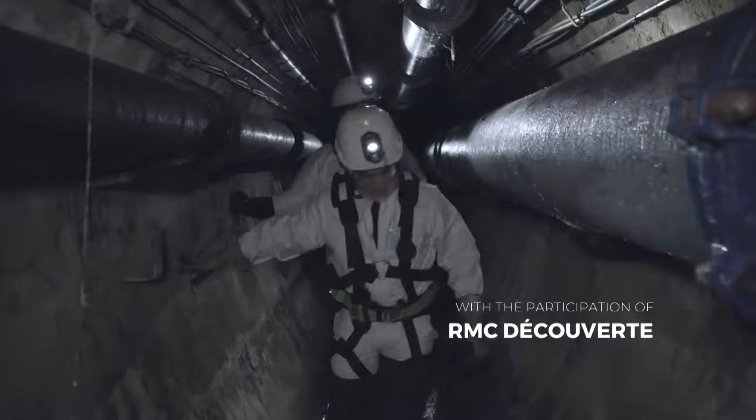Actually, underneath each street in Paris, there's a sewer that's accessible. It feels like entering the bowels of the earth. Like the city above, the pipes below are always on the move.

Every turn of a tap, every flush of a toilet, every minute of every day, Parisians depend on the waste they take away and the fresh water they provide. How does it all work so seamlessly? Now, thanks to unprecedented access and computer-generated imagery, you're about to discover the secrets of the Paris sewers, where close to 6.5 million cubic meters of wastewater travel daily, equal to 70 Olympic-sized pools per hour.

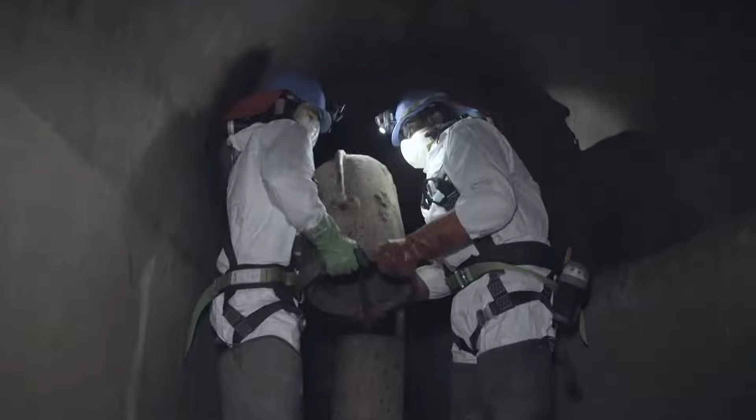This massive infrastructure demands extraordinary equipment, from high-power flushing systems and huge reservoirs to century-old boats designed to clear sand. The sewers are an undeniable part of the technical and urban legacy of Paris. The know-how and these extremely advanced constructions and machines have withstood the test of time.

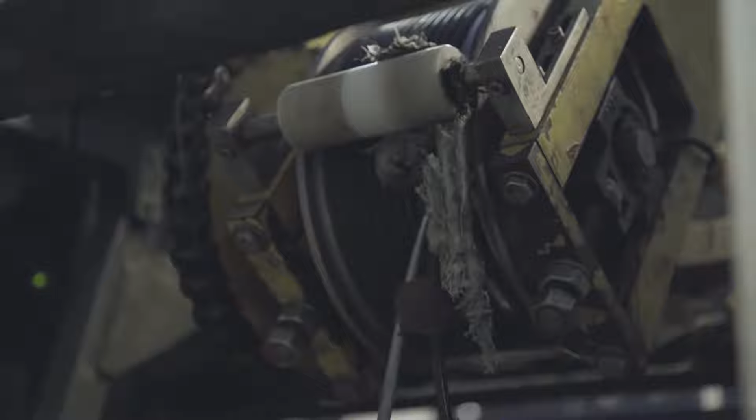Since its creation in the 19th century, the modernistic sewers have transformed to keep pace with the vital city above. Witness the elaborate techniques designed to deal with flooding, heavy rainfall, and provide high-speed decontamination. Nowadays, thanks to accelerated techniques used inside the plant, we're able to treat wastewater in just a few hours.

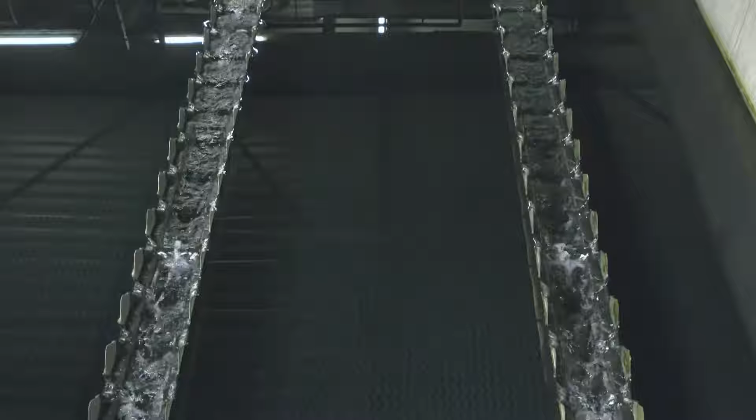From the collection of rainwater and wastewater to the distribution of drinking water, your sewer tour will take you on a fascinating behind-the-scenes adventure in history and technology, deep inside the bowels of Paris, without getting your feet wet.

Every day in Paris, more than 2 million residents flush their toilet, clean their dishes and clothes, and take a shower. All this domestic water ends up in the sewers. This amounts to over 6.5 billion liters of wastewater that must be evacuated each day. Every hour, the equivalent of 70 Olympic-sized pools flows inside this invisible yet gigantic infrastructure.

In fact, the sewers are a network of tunnels mirroring the layout of the streets and boulevards above the ground. In total, 2,600 kilometers of galleries meander underneath the city. If they were put end to end, the sewers would cover the distance between Paris and Moscow.

This extraordinary infrastructure serves several purposes. On top of collecting wastewater, these tunnels gather rainwater and prevent the flooding of Parisian streets when heavy storms occur. This network also plays a crucial role in providing drinking water to local residents. The underground galleries host a 2,000-kilometer network of pipes distributing drinking water to every Paris household. Once used, this water returns in the sewer system located only 3 meters underground.

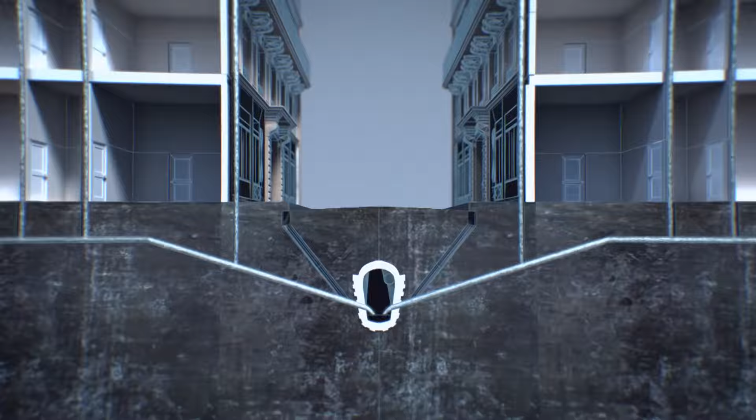Each building has its own evacuation outlet connected to a primary sewer that's about 1.3 meter wide. This first link of the sewer chain then reaches a subcollector. The latter flows in a main collector between 4 to 6 meters in diameter, located under the big Paris boulevards. This system can be compared to what you have in nature, such as a source, a small brook flowing into a river until it reaches the sea.

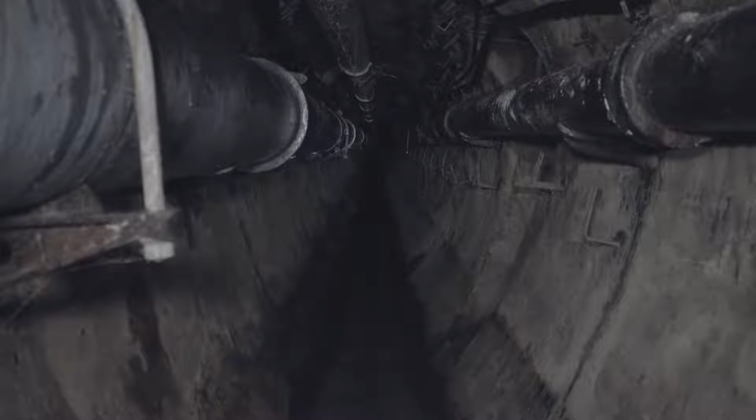It uses the exact same process: the elementary sewer collects wastewater from a single outlet before flowing into a collector and finally reaching the sea, which is represented by the water treatment plant. The mission of the sewer system is to evacuate the wastewater of over 2 million Parisians, 24 hours a day, 7 days a week. In order to maintain this hidden network, city workers go inside the sewers on a daily basis.

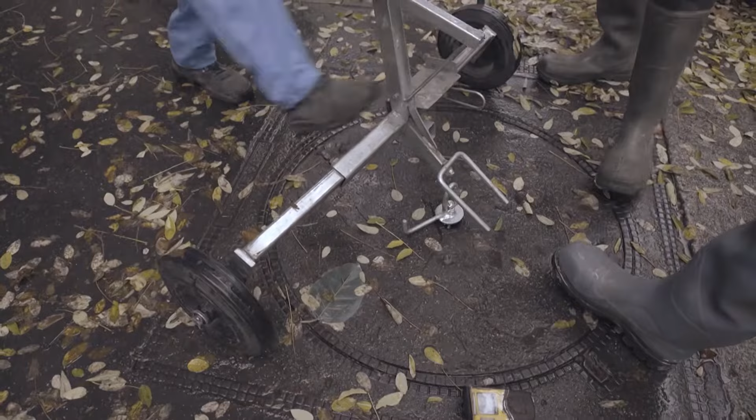Sewer workers access the tunnels through one of the 20,000 manholes scattered across the sidewalks of the capital. Each lid weighs over 80 kilos. Under the pavement, workers find themselves in a confined space ruled by darkness and humidity. This hidden and mysterious part of Paris is completely unknown to most of its residents.

At first glance, the sewer network looks like a maze of alleys and narrow pathways. But in essence, this huge infrastructure is just a mirror of the city streets. Each street, avenue, and boulevard have their counterpart sewer tunnel. This 2,600-kilometer network provides every Paris building with a direct link to this intricate universe.

Right now, we're under Rue d'Alésia. As you can see, sewer workers install signs to serve as bearings. Every building found above ground has its equivalent inside the sewer system. Here, we're under number 61 and 63. These are the two building outlets. Someone probably flushed their toilet or used water from this section of the building, which is now being collected.

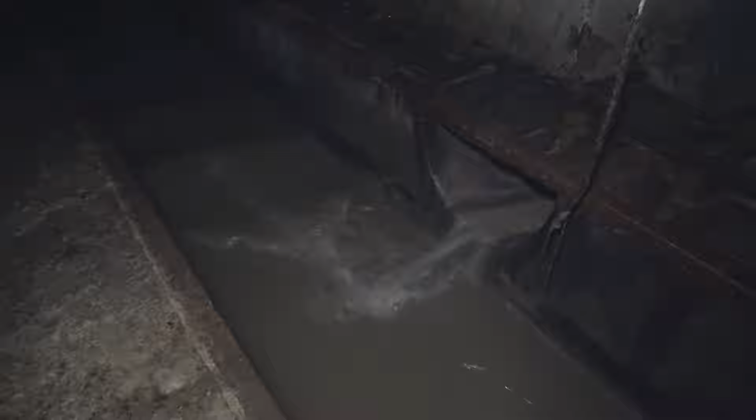Paris has a total of 100,000 such connections, linking every building to the sewer system. Wastewater from each building is gathered in a single evacuation pipe before being discharged into the sewers.

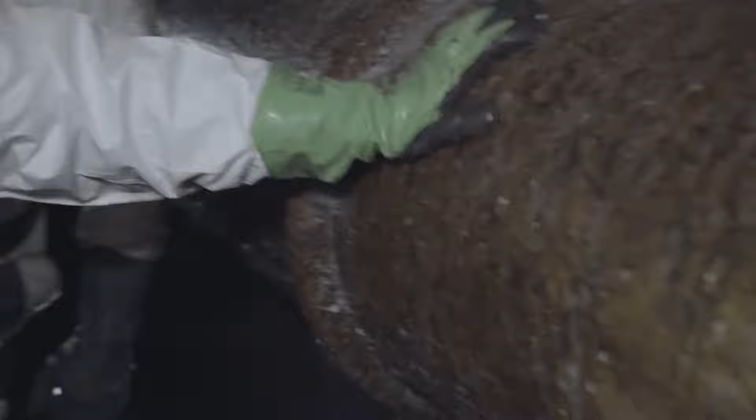In Paris, some 300 sewer workers are responsible for the safe flow of wastewater. Every day, they walk inside the bowels of the capital in order to maintain this gigantic network. These galleries are part of the historical heritage of Paris, designed over 150 years ago.

In the beginning of the 19th century, wastewater drainage was fairly rudimentary. As a result, whenever heavy rains would fall, black water would flood the streets, releasing a foul smell.

Paris was at the mercy of the Seine River. In times of floods, the river would commonly rise through people's cellars and the sewers, which caused the water to pour out onto the streets, carrying garbage, filth, and all the disgusting things traditionally found in urban settings.

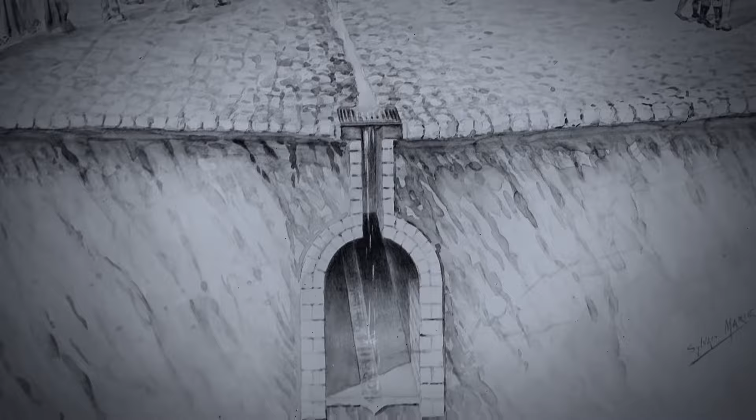In the early 1800s, Paris only had a few dozen kilometers of sewers at its disposal. There were hardly any sewers. Moreover, they were poorly designed and maintained. As a consequence, the city was, according to its residents, unpleasant for both the eyes and the nose.

The poor drainage of wastewater caused several cholera epidemics, killing thousands of Parisians. This dire situation needed to be addressed.

The sewer revolution started with the arrival of Napoleon III and Prefect Haussmann. The city underwent an unprecedented transformation, both on the surface and under it.

Wastewater had to be drained from the streets and the open air. They had to find a way to make it disappear, thus creating a clean city with tree-lined walkways and everything else featured in a typical modern city of that day and age.

For Paris to be worthy of its status as the City of Light, the streets had to be cleansed at all cost. The sewer system was quite important. Not only did the government want their city to be beautiful and bright, but also clean. And a sewer system was a key part of this urban planning that also carried a political aspect.

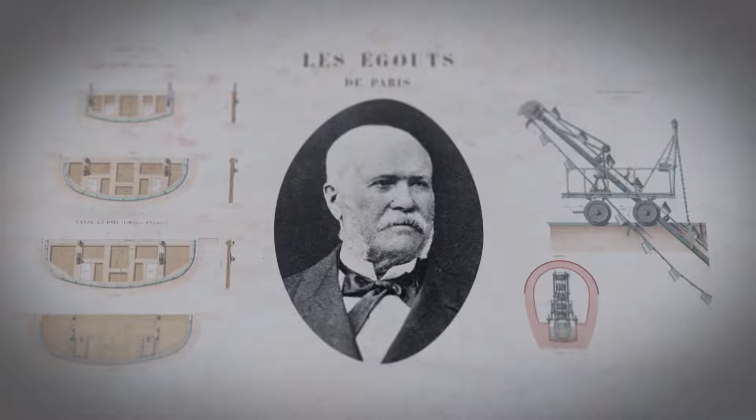To clean Paris, Prefect Haussmann entrusted visionary civil engineer Eugène Belgrand with this ambitious mission. Belgrand's goal was to drain black water through a gigantic underground sewer system.

Belgrand's idea was to develop an underground city planning far more advanced than before. He wanted to dig underground galleries able to collect a large amount of water, and in doing so, to develop a city on 2 levels. The scale of his project was quite utopic.

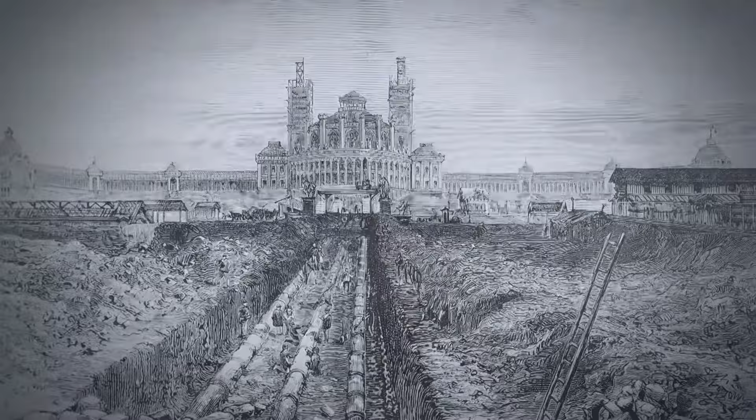To see their mission through, Haussmann and Belgrand undertook colossal work. Every street of Paris was successively ripped open and tunnels were dug. The work stretched over several decades and forever changed the face of the capital.

By designing this huge underground infrastructure, Eugène Belgrand revolutionized the Paris sewers. In order to drain the capital's sewage, he imagined a gigantic network collecting both wastewater from every household as well as rainwater.

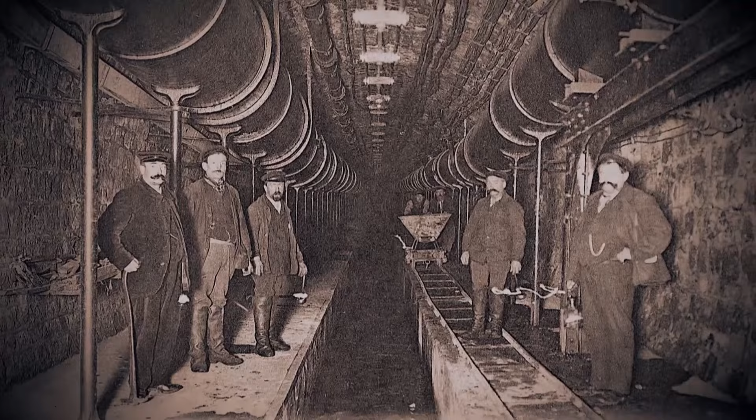Under the action of gravity, these waters would flow towards the northwest of Paris, thanks to the city's natural hills. The system works automatically, relying on the principle of gravity, and without any mechanical action. The use of gravity, therefore, makes pumping unnecessary, which is a very expensive and tricky system to maintain.

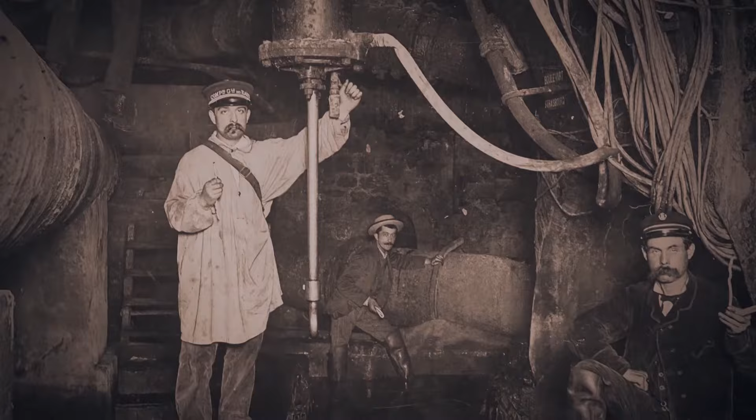Another feature that was unique in the world is that all the galleries were accessible, allowing sewer workers to walk freely along them.

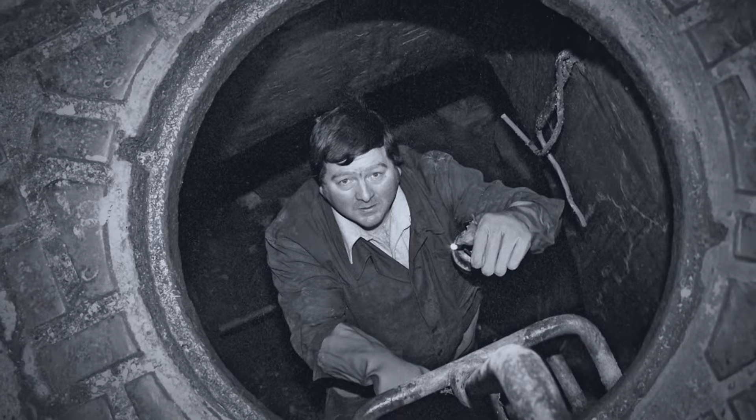Belgrand was a visionary. He established his work's dimensions based on his prediction for Paris's growth and influence on the rest of the world. That's why he designed large, accessible sewers, which facilitated the maintenance work. A blocked pipe requires a lot of disruptive work above the ground, but when the sewers are accessible, we can go inside, take action, and find the source of the problem.

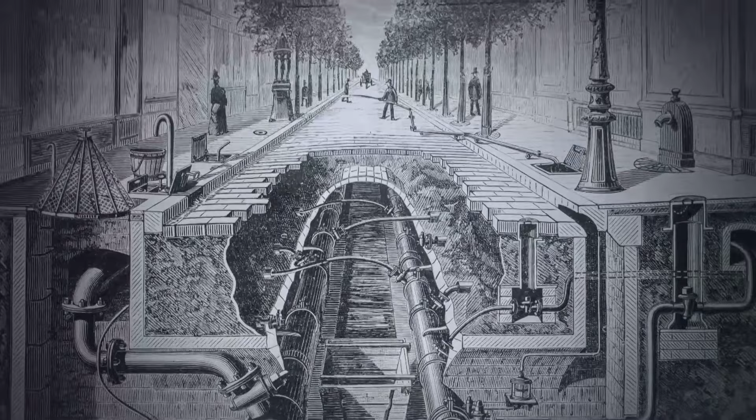In just a few decades, Belgrand and his successors accomplished colossal work. They built hundreds of kilometers of sewers, allowing the discrete drainage of rain and wastewater.

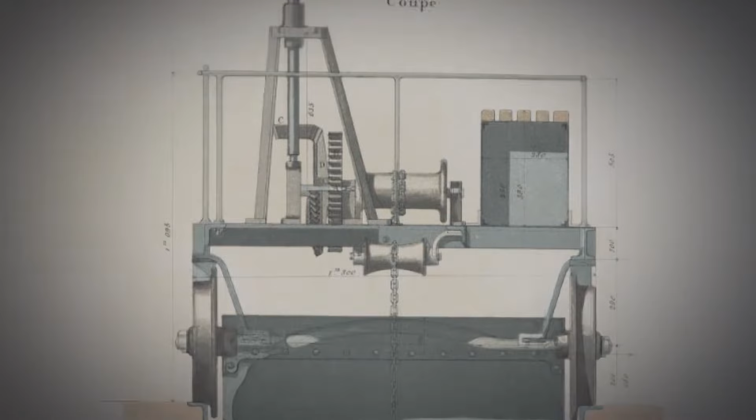But that's not all. In order to maintain and prevent waste matter accumulation inside this gigantic network, Belgrand had an original idea. He imagined a unique, spectacular system: cars and boats designed to travel inside the galleries and scrape the bottom of the sewers.

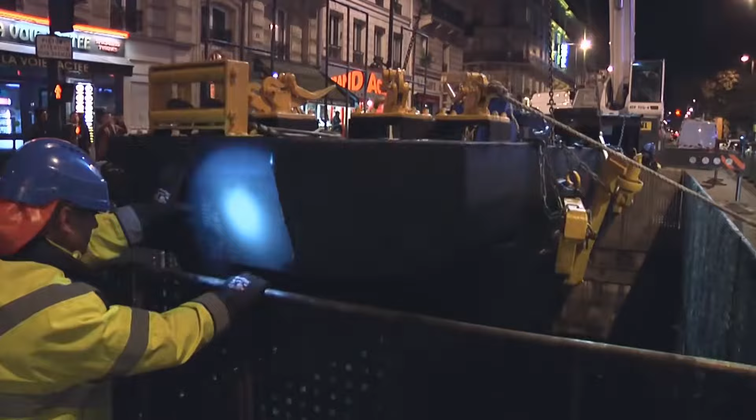To this day, sewer workers use these huge vehicles to go down the city's main collectors. Gate boats weigh almost 5 tons and measure 10 meters in length and 2 meters in width. This delicate operation is usually done at night to avoid disrupting city traffic. It takes 6 hours to lower a beast this size. Once inside the sewers, the scrubbing operation can begin.

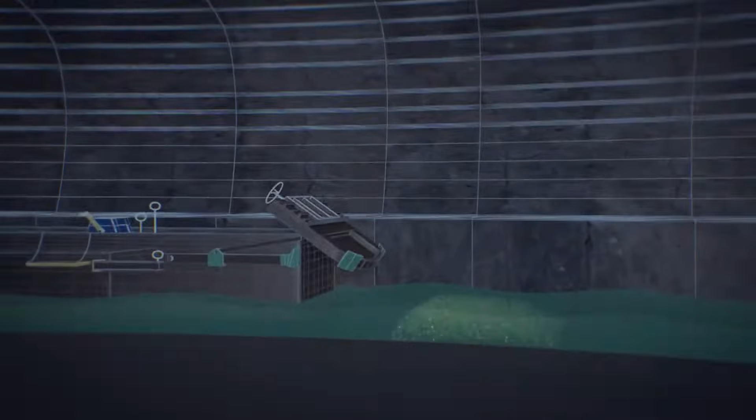When the boat comes to a heap of waste matter, it's blocked. Sewer workers then lower the gate. Moored with chains, the boat is lifted under the effect of rising water coming from the back. When the level of water is sufficient, the gate is swiftly opened. The flowing water removes the deposits and pushes them forward inside the tunnels. This is how the boat makes its way inside the collector, stopping each time a heap appears or when it's blocked by any unusual object.

Inside the collectors, sometimes we find wheelbarrows left behind by construction workers, cinder blocks, car tires, or tree grates like those you find around the trees in Paris. I don't know how they end up in the sewers, but we find them quite often.

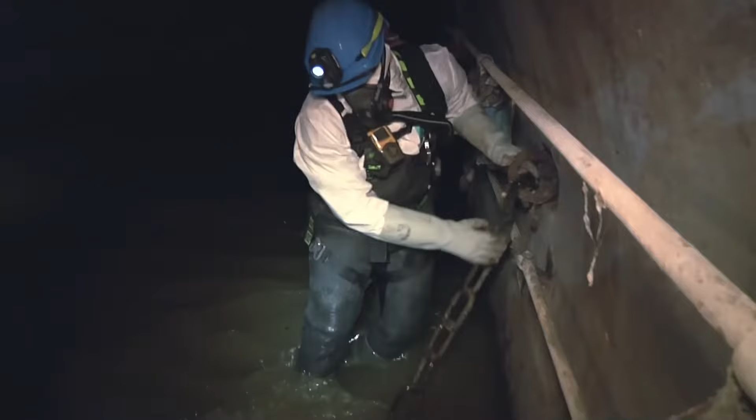Several months a year, sewer workers navigate a dozen gate boats inside the network of main collectors. This operation is very delicate. It requires the participation of 7 workers who must remain alert at all times in a noisy environment. The workers take turns during the entire operation. For example, the chains in the back of the boat weigh 80 kilos, so it's very demanding physically. It may not seem like it, but operating the gate is super hard.

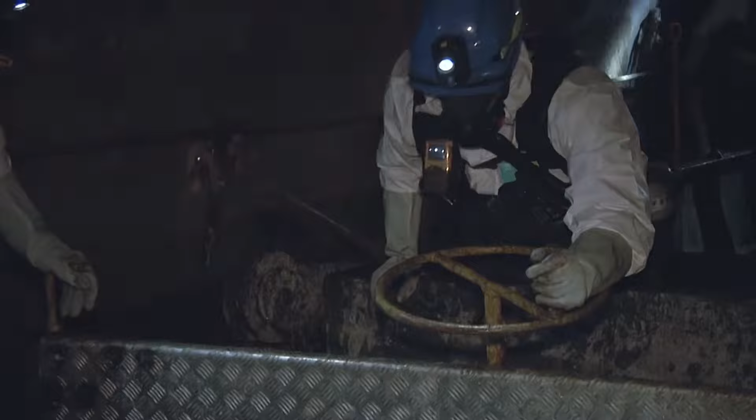Gate boat crews are actually navigating a 5-ton vehicle under the thrust of water. If they slip up and the boat starts going, it can't be stopped. The job requires a high skill level.

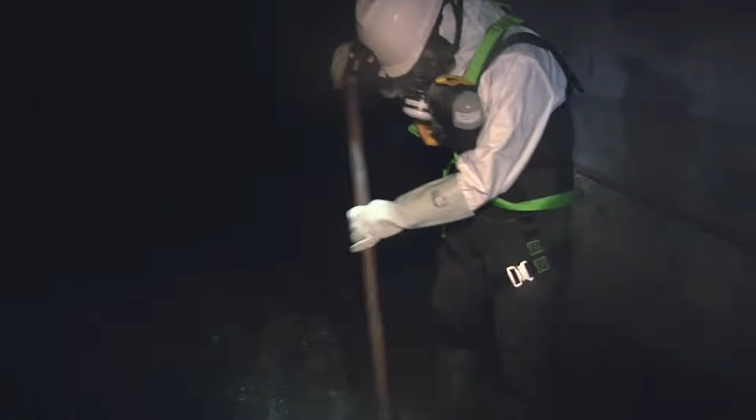These huge gate boats have been navigating inside the bowels of the capital for over a century. As it moves forward at a speed of 30 meters a day, the gate boat pushes the waste matter towards a sand trap.

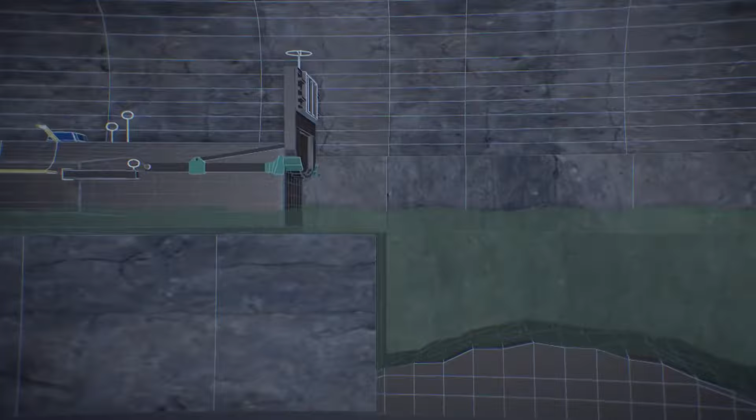Thanks to the visionary genius of its creator, its great dimensions and regular maintenance, the sewer system has successfully lasted over a century. The men working in the sewers today carry out the same operations their colleagues did 100 years ago. However, their protective gear has been improved, as the sewer environment can be dangerous.

Inside these dark, confined sewers, the main danger is invisible. In some places, solid substances accumulate and decompose, thus creating potentially lethal gases. One of the most dangerous is hydrogen sulfide, which stems from the decomposition of organic matter. But there's also carbon monoxide and methane, a highly flammable gas.

Whenever the presence of gas is detected, developing accurate reflexes is vital. Sewer workers must precisely know how to use their protection gear. To that end, they go through rigorous simulation drills on a regular basis.

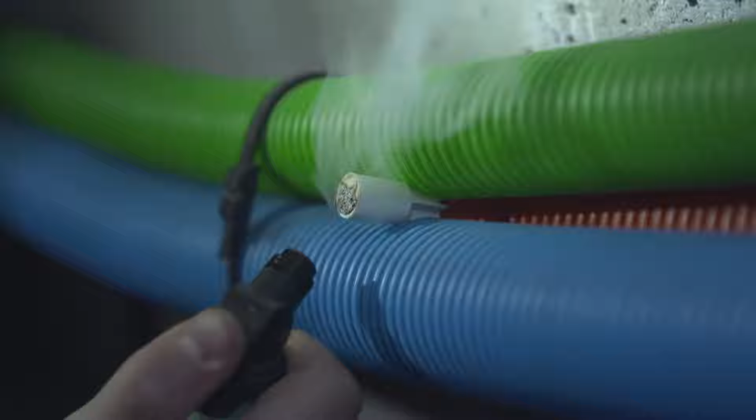A control box sets off an alarm after detecting the presence of abnormal gas. In order to shield themselves from this potentially deadly gas, workers must put on their masks as quickly as possible and protect their respiratory systems. They're equipped with self-rescue masks that provide them with 30 minutes of air supply, which is more than enough time to exit the sewer.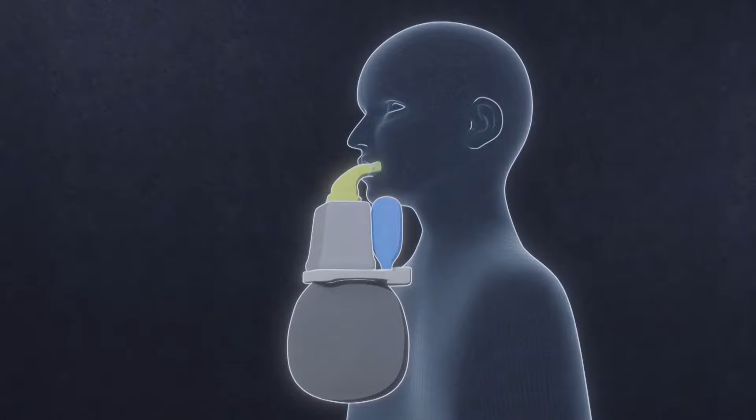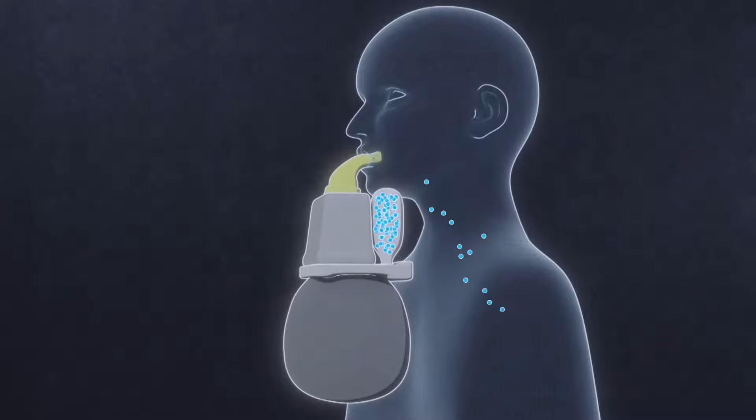These emergency masks come with a small compartment containing a supply of compressed oxygen. As soon as the mask is in place, the oxygen is released, allowing the user to safely breathe through a self-contained device without any outside air supply. This great innovation ensures the survival of workers when confronted with lethal gases.

Between suspended matter, gases, bacteria, and fungi, the dangers are many. Our biggest enemy inside the sewers are gases and bacteriological hazards. We're working inside a huge pipe filled with feces, filth, and many other horrible things. Breathing it in or being in contact with it involves serious risk. It's an extremely difficult job.

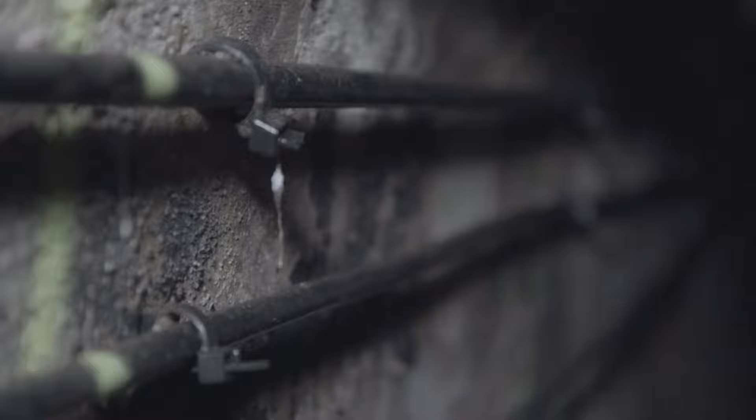These days, sewer workers are not the only ones working inside the bowels of the capital. Other technicians also go down these tunnels. The sewer system doesn't only drain wastewater, it also serves as a technical gallery, hosting the internet wiring and streetlight power cables. What's even more surprising is that it hosts the entire city's drinking water supply line.

These drinking water lines are installed on the roof of the underground galleries. In total, a 2,000-kilometer piping network runs across the sewers in order to supply each and every building. This parallel network was designed and conceived at the same time as the creation of the modern sewer system 150 years ago. Up until the end of the 18th century, certain Parisians still got their water directly from the Seine River. But back then, the water was contaminated.

Since the Seine River was used as a main drainage, its water was extremely polluted, which is why Marivaux, while debating on the subject not long before the French Revolution, had this true, powerful quote that says, "Parisians empty their chamber pot in their carafe." While the poor got their water directly from the Seine River, the rich hired water carriers who collected water from public fountains supplied by better quality underground sources.

But there wasn't enough water available to meet the needs of all Parisians. In the middle of the 19th century, Prefect Haussmann had the idea of drawing cleaner water outside the capital. Eugène Belgrand, who was responsible for creating the sewer system, was also tasked with the mission of bringing drinking water to the heart of Paris. To achieve this, he imagined an entirely connected, complex network.

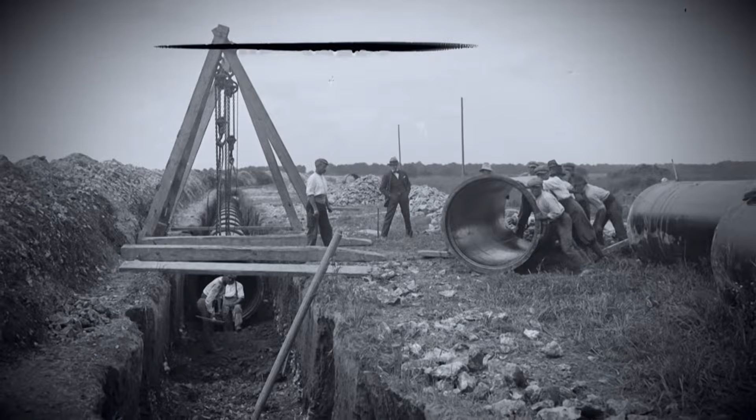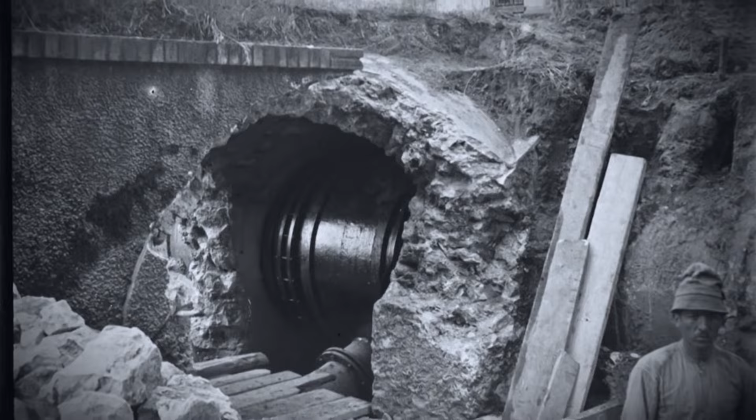The engineers started by locating several water sources within a 150-kilometer radius around the city. But drawing water was not all. It needed to be transported all the way to Paris. Inspired by the Romans, Belgrand had a gigantic aqueduct network built in order to carry water over huge distances. In these monumental structures, the water simply follows the natural inclination of the land until it reaches the bottom of the Paris area. It flows from the source under the action of gravity, all the way to the edges of the capital. Then, the water runs along the pipes inside the sewer network.

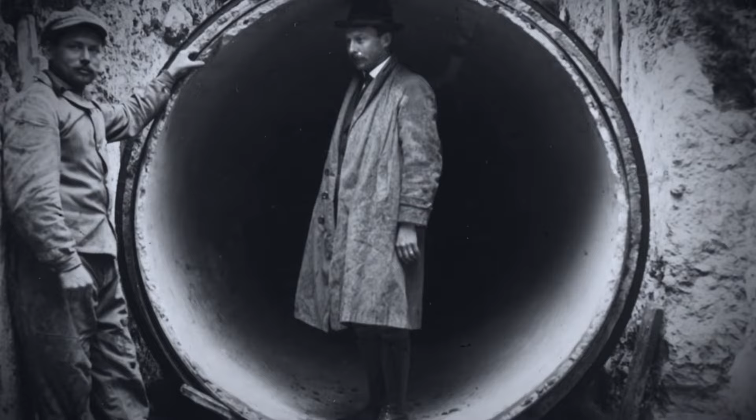Belgrand used the principle of gravity. In other words, the water flowed towards Paris because it came from a higher ground. He used the topography of the Parisian area, which was not only relevant, but it also contributed to the system's resilience, as evidenced by the fact that it still provides half of the water consumed in Paris. This colossal worksite, built in parallel with the construction of the Paris sewers, lasted about 40 years. The work was completed well after Belgrand's death in the early 20th century.

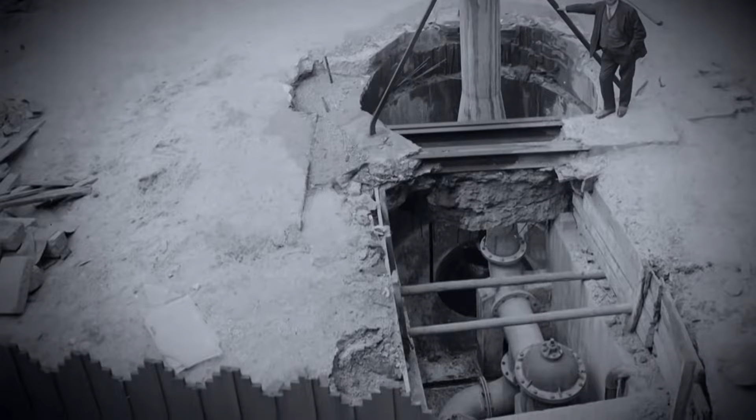The work accomplished by Belgrand and his successors is remarkable. In total, 470 kilometers of aqueducts were built. To this day, these structures bring water drawn from about 100 intake points all around Paris. Finally, the drinking water is distributed to Parisian households, thanks to some 2,000 kilometers of pipes installed inside the sewer network. At the time it was designed at the end of the 19th century, this unique network, used both to drain wastewater and to distribute drinking water, was a genuine innovation.

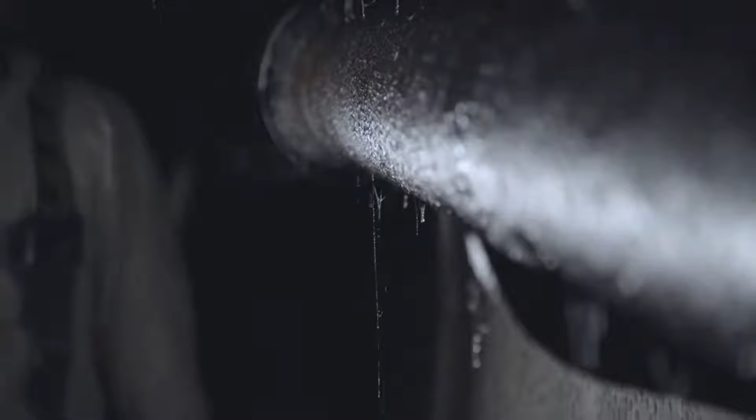The most remarkable thing about Belgrand's system is its longevity. To this day, Eau de Paris uses the network that was designed and built by Eugène Belgrand and his successors. Today still, the sewer network plays a key role in the distribution of drinking water across the capital. This joint system offers a tremendous advantage, as the pipes are accessible from inside the tunnels. In the event of leaks, or simply to maintain the pipe network, the city doesn't have to rip the streets open or hinder traffic. City workers have direct access to the sewers.

The drinking water pipe network hangs from the ceiling. Water travels inside 2,000 kilometers of pipes inside the sewers, distributing water to every building and fire hydrant. Every so often, the pipes start to leak and need replacement. Despite the proximity between the drinking water and wastewater networks, there is a zero risk of contamination. The pipe is under pressure along its entire length. There are no weak spots. We're absolutely positive that nothing can enter the pipe. No foreign body can get inside.

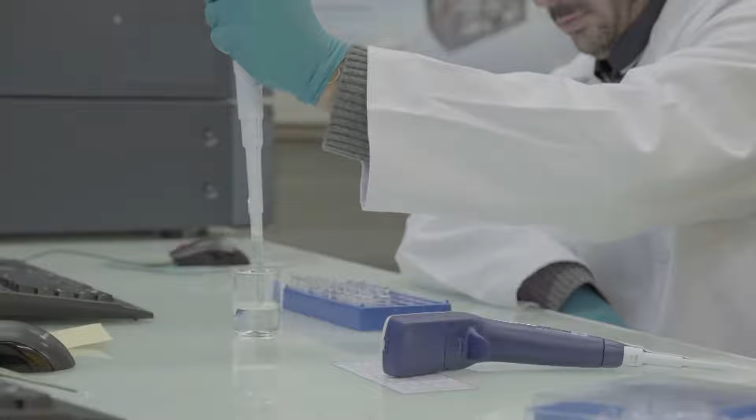Water is the most closely monitored consumer good in all of France. In Paris only, it undergoes over 1 million tests every year. These are done through all the stages of the distribution, well before the water reaches the sewers. Every measure is taken to ensure water of the highest quality.

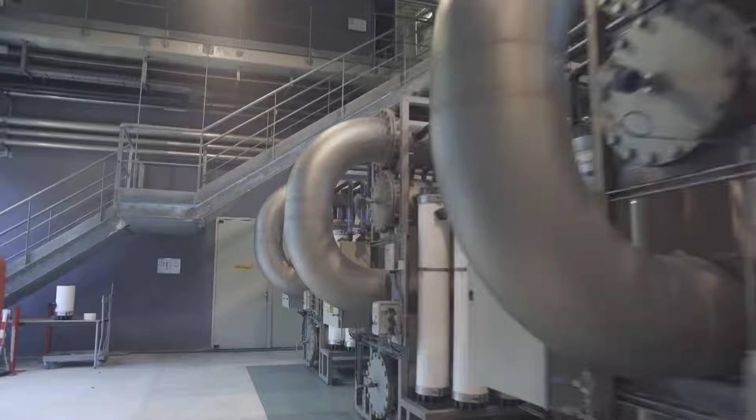Before traveling inside the sewer system and reaching Parisian households, the water undergoes a series of treatments. Some are done here, at the water treatment plant of L'Haÿ-les-Roses, just south of Paris. This gigantic facility collects underground water from the Sens region. The state-of-the-art plant produces 110,000 cubic meters of water every day, which amounts to 1/5 of the capital's drinking water needs.

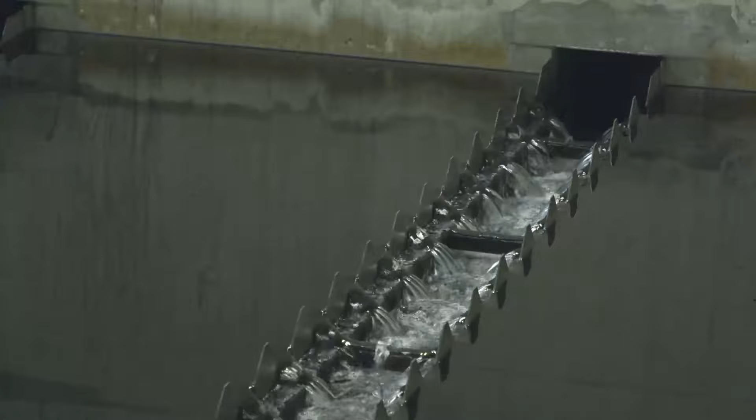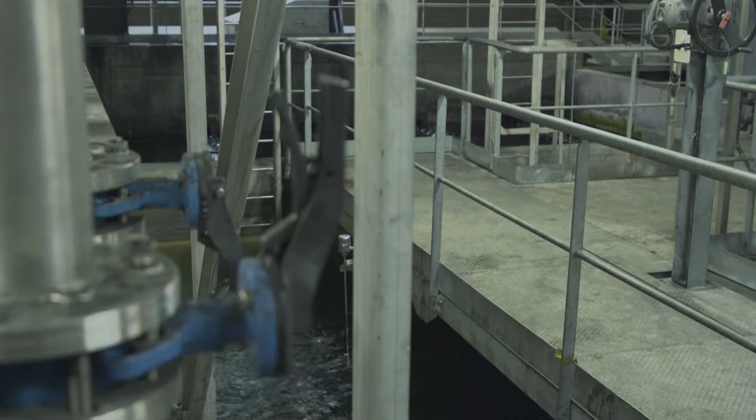When it reaches the plant, the water seems clear. However, it contains several substances invisible to the naked eye and potentially hazardous to our health. The water is already clear, but it's not clean enough to drink. In fact, it contains materials such as ground minerals, bacteria, and parasites. These elements, together with pesticides, will be eliminated through a thorough treatment process.

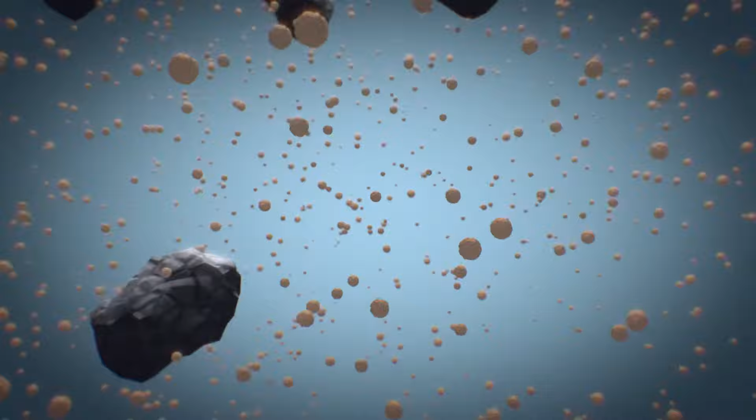The first part of the treatment involves pouring the water inside huge tanks saturated with carbon powder. Active carbon is highly porous and attracts, just like a magnet does, a great number of suspended particles, such as pesticide residues. The water is then relieved of these substances through a settling process before being sucked up and sent to the second stage of purification.

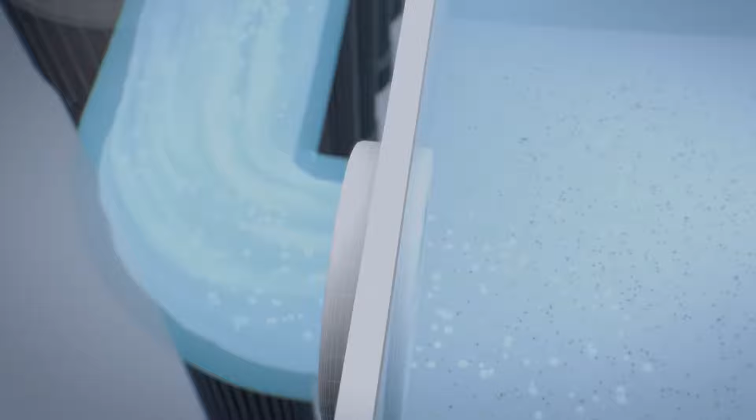When water reaches this gigantic room, it's pushed under high pressure inside one of these white units. This is the ultrafiltration stage. Ultrafiltration is actually a mechanical filtration. In other words, it uses the same principle as a sieve or a coffee filter, but in this case, the mesh is very small, only 0.01 micrometer. This means we catch any particle bigger than 0.01 micrometer.

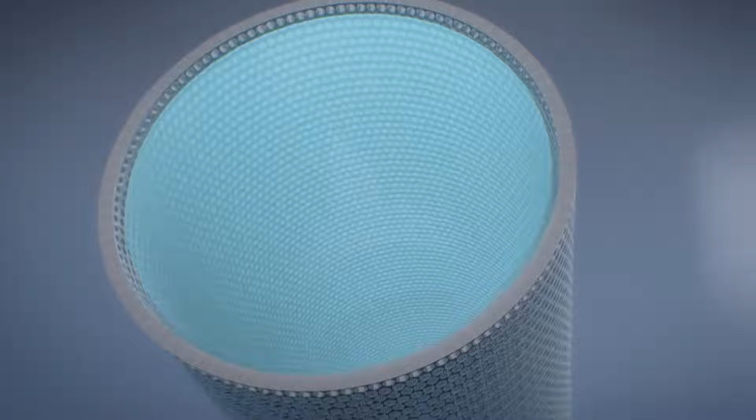Each unit contains about 100 tubes. These tubes are made of punctured membranes. The hole size is 0.01 micrometer, which is 10,000 times smaller than skin pores. That means no bacteria, virus, parasite, or any organism can go through this barrier.

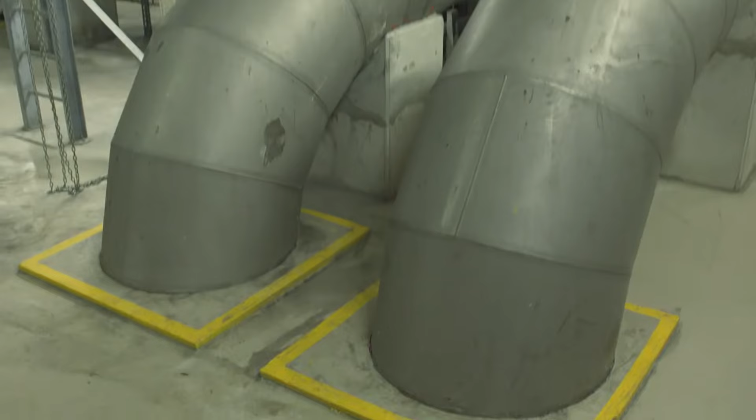The total surface area of this ultrafiltration plant equals 66,000 square meters, meaning that our process is highly concentrated. If we were to build it with a different technology, the equivalent of this room would require a surface area between 60 to 70 soccer fields, which is substantial. After this stage, the water is almost drinkable. It has been freed of all the undesirable substances, but it still contains minerals.

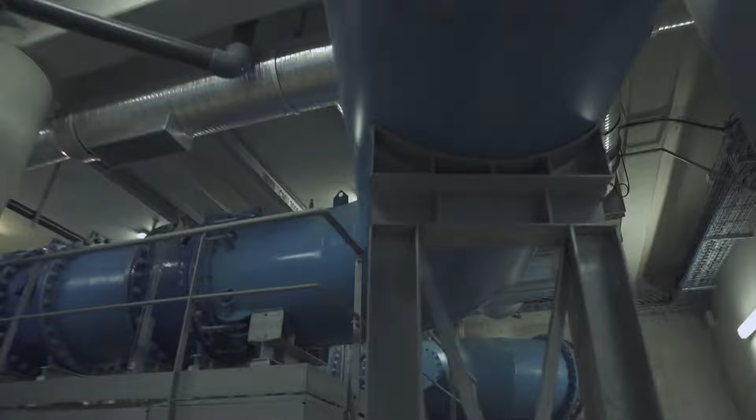During the last step, a small amount of chlorine is added. This will preserve the water quality during the entire time of its storage and transportation. This step is absolutely necessary before the water can travel inside the pipes across the gigantic Paris sewer network. Nowadays, half of the water consumed by Parisians comes from underground sources treated in purification plants located close to the aqueducts.

The other half is drawn from the surface waters of the Marne and Seine rivers, which are also treated in plants surrounding the capital. By multiplying the supply sources, Paris is able to meet the needs of all of its residents. This creates an extremely strong and resilient system while ensuring its resistance in the event of a crisis. This is all thanks to the 5 different vectors made up of 3 underground sources and 2 surface waters, the Marne and the Seine rivers, allowing us to produce twice the actual daily needs of Parisians.

When it comes out of the treatment plant, the water hasn't reached its destination yet. Before traveling along the sewer network to be distributed inside the homes, it has to be stored in one of the 5 main reservoirs of the city. These are huge covered pools, and the most emblematic is located in the 14th arrondissement. Under this land spreading over 3 hectares, the equivalent of 4 soccer fields, hides one of the most important water reservoirs of the capital, the Montsouris Reservoir.

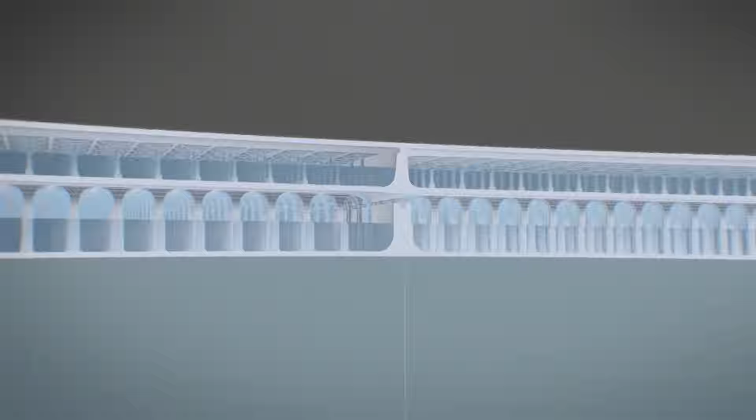Away from prying eyes, this unique pool is shielded from light and pollution in order to protect water quality. Access to this sensitive strategic location is strictly restricted, and most Parisians are unaware of its existence. This monumental 2-story building is divided into 4 superposed compartments, spanning a total surface area of 254 by 125 meters. Its hundreds of pillars support a multitude of vaults and archways on both levels of the reservoir. This architectural masterpiece was nicknamed the Water Cathedral.

This exceptional building is yet another legacy from Eugène Belgrand, who imagined and designed this reservoir while building the sewer network. The building's architecture is absolutely remarkable. The lower reservoirs are 7 meters high, while the higher ones reach a height of 5 meters. The 1,800 pillars are the actual frame structure of the building, which represents an architectural and technical feat for that time.

At first, the underground water coming from the aqueducts reaches this building located above the Montsouris Reservoir. Each day, the equivalent of 67 million water bottles springs inside this building.

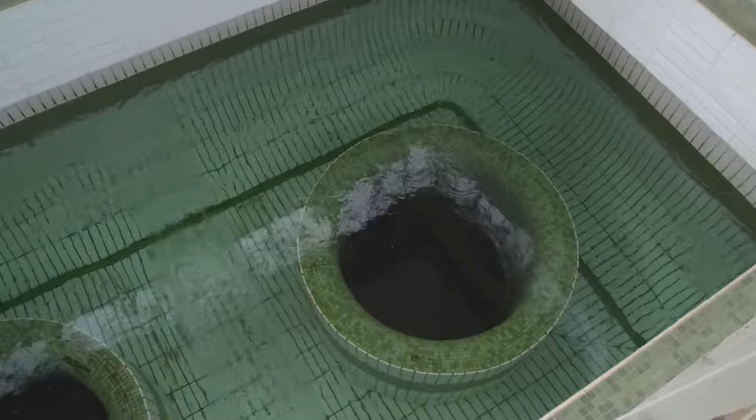The names of the various sources throughout the years are inscribed on the walls. The water is then distributed to the compartments of the reservoir, where it is kept at the same temperature as the source, 12 degrees Celsius. The water level varies depending on the time of day and the demand.

The Montsouris reservoir level, just like all reservoirs in general, reaches a consumption peak every morning between 6 and 8 a.m., when most people get up, clean up, and use water. Once the consumption peak has passed, the reservoir is slowly emptied as the day goes by, before being filled up again during the night, thanks to huge custom-made gates.

The water from the Montsouris Reservoir flows directly inside the pipe network that travels along the sewers of the capital. It discreetly distributes water to each building from galleries under the pavement. To anticipate the demand, the network is equipped with thousands of sensors distributed along the entire water path, from its production to its distribution through the Paris sewers. Every day, these sensors collect millions of data that are analyzed in real time at a control center.

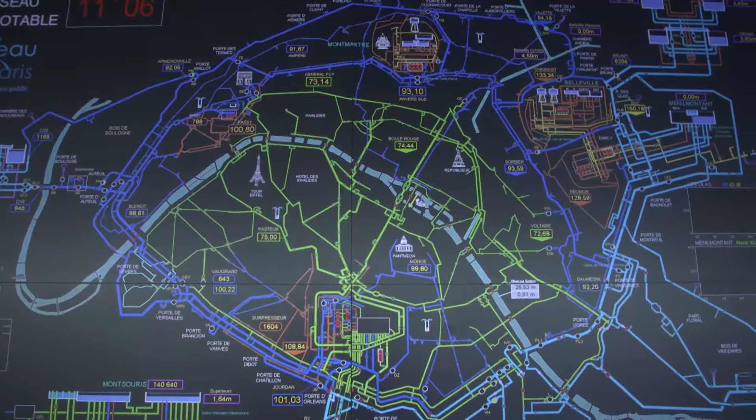In this ultra-secure room, agents remotely coordinate drinking water stocks allocated to the capital. They monitor the entire network in real time, including the 2,000 kilometers of underground pipe network within the sewers of the city. Inside this control tower, the dispatchers take turns 24 hours a day to meet the needs of the Parisians.

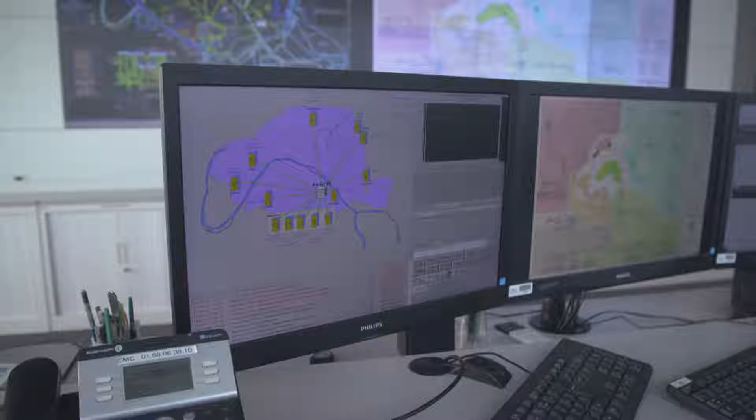Here, we process 19,000 variables, which amounts to millions of data points each day, and we're able to remotely control most of the facilities. On a daily basis, our dispatchers open the gates inside the network to increase pressure, fill reservoirs, and allow a more efficient storage. Their only goal is to ensure water distribution to every Parisian at all times, 24 hours a day.

On top of ensuring constant distribution of drinking water, the agents must also guarantee an even pressure in every faucet, which is set at a minimum of 2.5 bars. In the lowest neighborhoods of Paris, this pressure is reached naturally, since the reservoirs are located on higher grounds. The water flows directly under the effect of gravity. It's very environmentally friendly, as we don't need any driving force to push the water and guarantee its pressure.

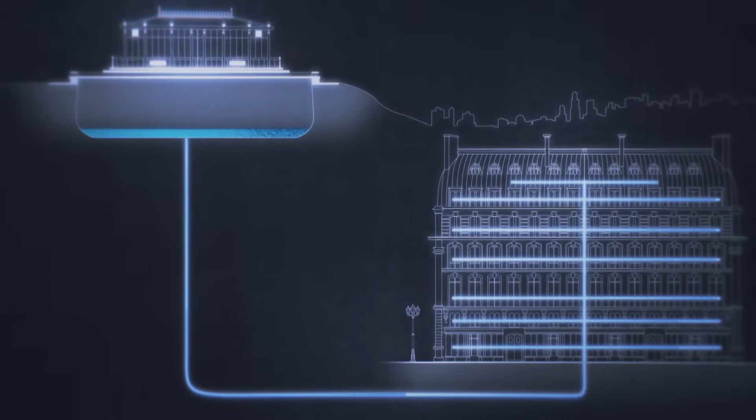In Paris, most reservoirs are situated on high ground at an altitude of about 25 meters. At their outlet, water is released at a pressure of 2.5 bars in the pipes located inside the sewer network. This pressure is sufficient to distribute the water to the buildings of the lowest neighborhoods of the city, all the way up to the 7th floor. Each day, close to 500 million liters of water are dispensed all around Paris.

On top of managing the drinking water, the Eau de Paris agency also ensures the distribution of non-drinkable water across the capital. This water is drawn directly from the Seine River and the Canal de l'Ourcq. Once filtrated and rid of its plant residues, this raw water travels through 1,700 kilometers of pipes that are also tucked inside Paris's sewer network. This ingenious system is once again the brainchild of Eugène Belgrand. The distinctive feature of the sewers is to house a double underground network providing both drinking and non-drinkable water.

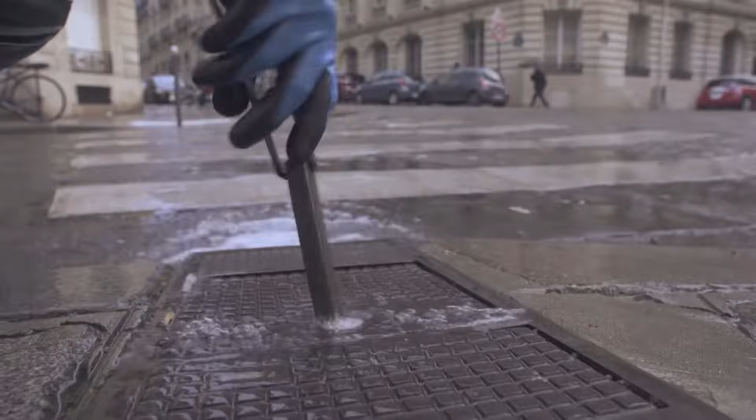This one-of-a-kind network for non-drinkable water is used to water gardens and supply decorative fountains. This non-drinkable water also plays a key role in the maintenance of the streets and sidewalks of the city. Every morning, cleaning crews open water supply gates. Over 17,000 such gates are scattered across Paris. The streaming water clears the gutters, carrying leaves and other trash in its flow. These water gates are also used to fill street cleaning trucks.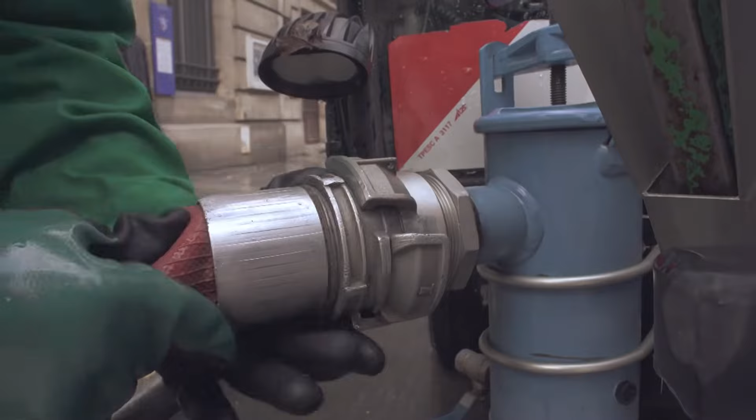The tourists who visit Paris are often surprised to see water flow along the sidewalks. They wonder what it's used for. They sometimes think it's being wasted. In recent years, we've been criticized on Twitter and told it was unacceptable to waste drinking water because it's a rare and valuable resource. But in reality, it's not drinking water. It's drawn directly from the Canal de l'Ourcq, or the Seine River. In that sense, it's very environmentally friendly since this water isn't wasted. It ends up in the sewers, where it helps evacuate black water.

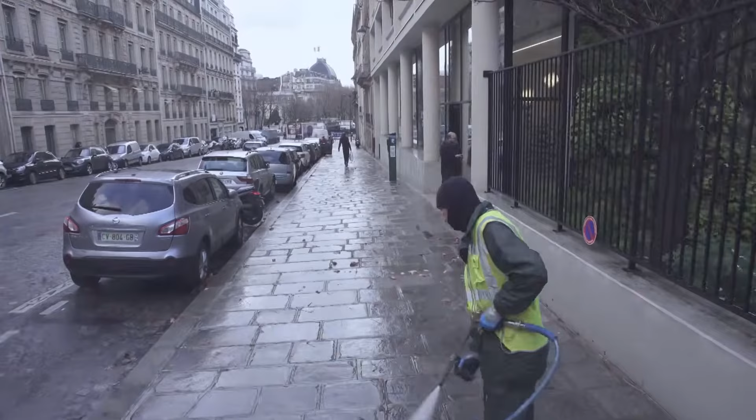The vast majority of the streets of Paris are on a slope. Therefore, the cleaning water flows naturally along the roads before ending up in the closest drain. This is how rainwater and cleaning water flowing inside the sewers facilitate the evacuation of wastewater. But it's insufficient to maintain the network, which is regularly blocked with sand.

On top of the imposing gate boats, another ingenious system was implemented at the end of the 19th century: a flush cistern. Several hundred tanks containing non-drinkable water are scattered across the network and regularly maintained by sewer workers. 1, 2, 3, right here. Let's put it over there.

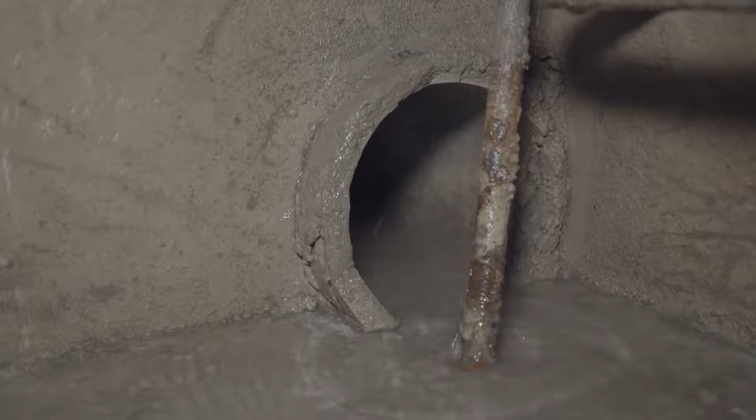It's a preventative measure to avoid potential organic matter deposits or rat traps. It creates a flushing action. It also contributes to better ventilation and keeping the tunnel generally clean, while helping the cleaning crews when they need to work on specific problematic sections.

Several times a day, these reservoirs fill up and release an average of 5 cubic meters of water. This fast, pressured water helps clear out the smaller sewers on a daily basis, while contributing to their cleaning. In fact, it's a bit like the one you have at home. It's basically the extra large version of a toilet flush.

Thanks to the water drawn from the Canal de l'Ourcq and the Seine River, the sewers are almost self-cleaned. The non-drinkable water network hence plays a key role in evacuating the wastewater through the 2,600 kilometers of tunnels underneath Paris. But when heavy rain strikes, water can become a dangerous enemy.

When significant storms occur, all the rainwater falls inside the gutters and combines with wastewater to block the sewers. The water level can thus rise dangerously and saturate the network. When it rains hard, rainwater is added to wastewater, and this can cause a flood. The tunnels are pretty large, but rainfall can still be very intense. And in that case, Paris could be flooded.

So in order to protect the more vulnerable neighborhoods, a drainage system was designed a very long time ago to make sure that the excess water, named the overflow, is poured into the Seine River by what we call a spillway. Paris has 44 spillways, which are galleries linking the sewer network to the Seine River.

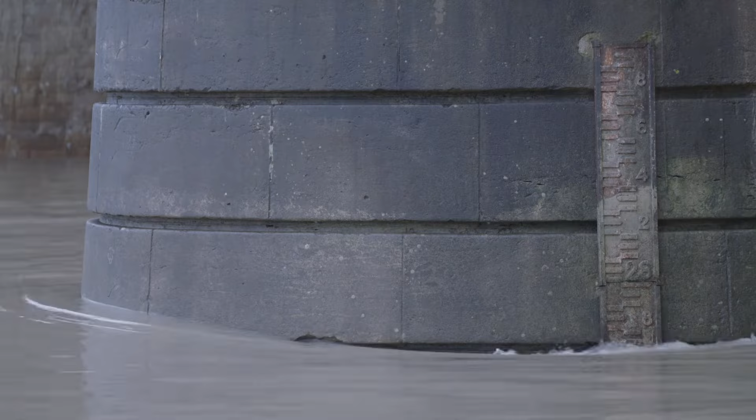In case of saturation, and to prevent the sewers from overflowing, these safety valves are open to pour the excess wastewater and rainwater in the river. On the other hand, when the Seine River is in spate, these spillways are closed to prevent the river water from pouring inside the sewers. These spillways are in fact linking devices between the drainage system and the natural environment, which is the Seine. When it rains too much, the spillway evacuates the overflow.

Since wastewater is highly polluting, huge underground reservoirs were built in the 1990s to prevent the overflow of black water in the Seine. They're located along the river, like this one under Parc de Bercy in the 12th arrondissement. This gigantic storage facility comprises 4 compartments measuring 200 meters long and 13 meters wide.

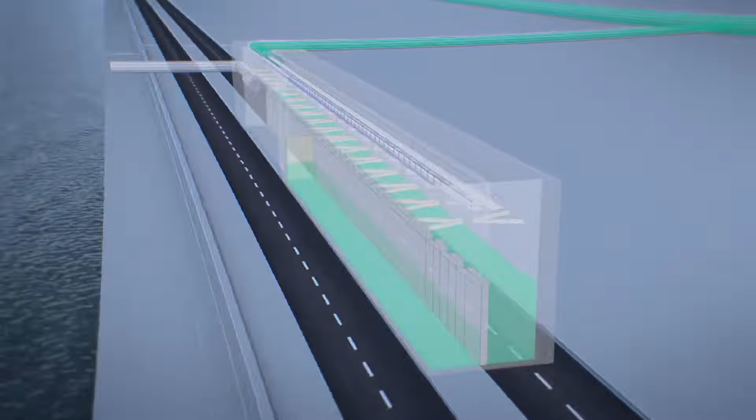In case of heavy rain, the 4 pools can store up to a total of 17,000 cubic meters of water from the sewers, which is the equivalent of over 4 Olympic-sized pools. After the storm, all this water simply returns inside the sewer network to be brought to the purification plant, where it will be treated under the appropriate conditions.

Nowadays, every possible effort is made to protect the quality of the Seine River. Thanks to its many storage structures, Paris can keep over 142,000 cubic meters of wastewater in case of heavy rains, the equivalent of 38 Olympic-sized pools. Over the span of 20 years, this system has proved its worth. It has lowered the volume of water discharged in the Seine River by 90%. Today, environment protection is the #1 priority.

At the end of its journey, after traveling through hundreds of kilometers of tunnels under the capital, the wastewater is transported to the plants located in the northwest of Paris. The sewer network reaches its destination in huge water treatment plants, such as this one in the city of Colombes. Every year, this gigantic plant treats the wastewater of over 1 million residents.

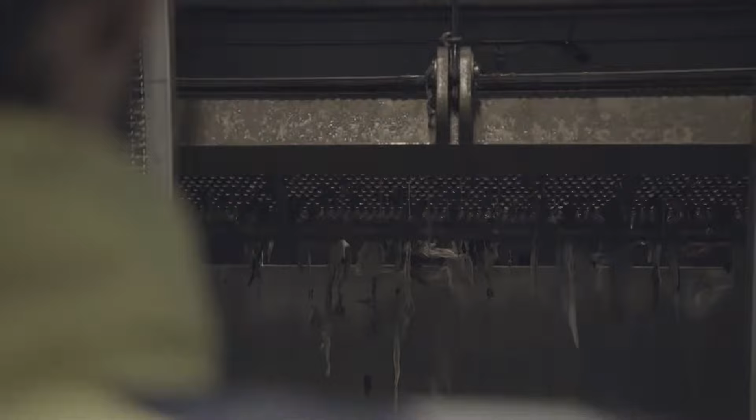One of a kind in Europe, it has the unique characteristic of being mostly buried. Indeed, 2/3 of the facility are hidden underground. Here, sewage water undergoes a real shock treatment. The first step is to eliminate coarse waste such as plant residue, wipes, or pieces of plastic. All this trash goes through huge filters.

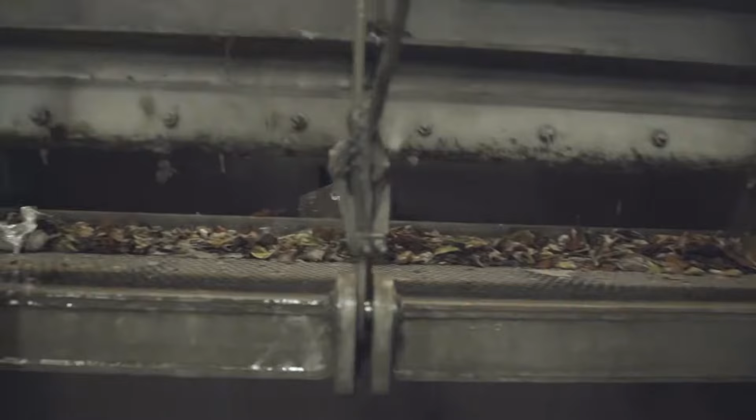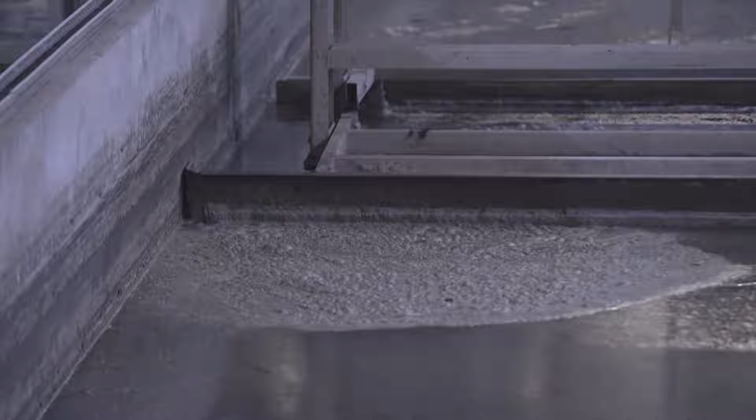These are meshes of various size that catch the waste, compress it, wring it out before sending it to a treatment plant. After going through the filters, the water continues on to huge settling tanks. In the Parisian region, there are construction sites all year round. This causes granulated materials and mineral deposits.

The more general term is sand, which is retrieved in a desander. As we slow down the water flow, these materials settle at the bottom of the desander, where we retrieve them. These huge compartments serve 2 purposes. They allow workers to fish out the heavy sand sinking to the bottom of the tanks. And simultaneously, grease rises to the surface and is collected with enormous scrapers.

The water is now rid of the more apparent waste. But it still contains numerous invisible substances derived from organic matter, such as carbon, phosphorus, and nitrogen. In order to capture these dissolved elements, water undergoes 2 types of shock treatments.

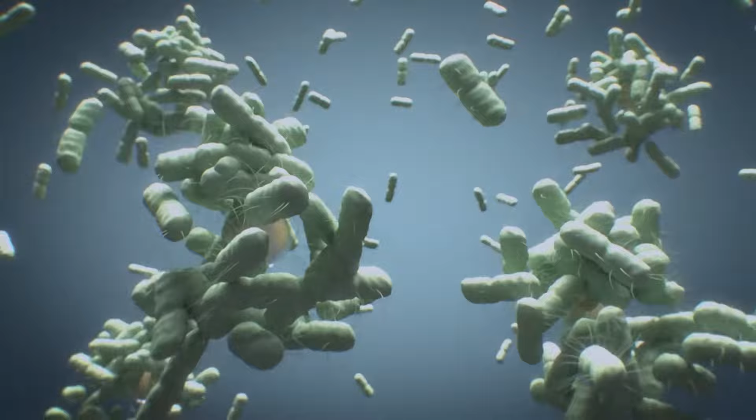A first chemical treatment captures the carbon and phosphorus molecules. Then, water is put into contact with millions of bacteria that digest the nitrogen found in urine. This step is called biofiltration. After these chemical and biological treatments, the water is completely purified, and in record time. Each drop of water is treated in just 2 hours before being returned to the Seine River.

The sewer system and the advanced performance of wastewater treatment both contribute to the improvement of the ecological state of the natural environment of the Seine and Marne rivers. Today, we notice that fish life is growing more and more as we discover new species every year.

Thanks to the improvement of purification techniques, the waters thrown back in the Seine River present no risk to aquatic life. Each year, several billion liters of water are returned to the natural environment. These days, the entire sewer system, from the wastewater collection to its purification, is studied in order to ensure the protection of the environment and possibly even change it into a reusable resource.

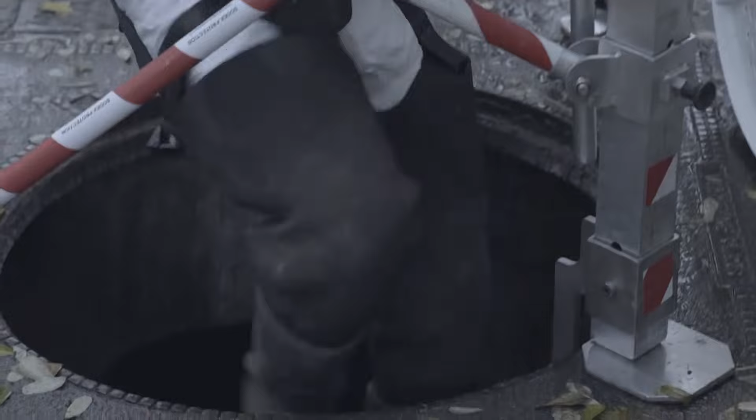What if sewage could become a source of energy? For the longest time, sewage was a waste, and it had to be kept underground, which is why the system was designed this way. But today's reflections are a bit more open, and we consider that the sewer system could be used for things other than just evacuating waste, even though it must obviously maintain its primary function.

When it comes to sewer systems, wastewater can indeed be used to heat buildings. By installing a heat exchanger in the sewers, it's possible to heat the nearest building through an adapted heating system.

Retrieving heat from the sewers to heat up buildings is the astounding innovation that's been implemented in the capital since 2016. The water inside the sewers has an average temperature varying between 14 and 20 degrees Celsius, thanks to the hot water drain from bathrooms, but also washing machines and dishwashers all around the city. With a heat exchanger, it's possible to recover this valuable heat from the sewers.

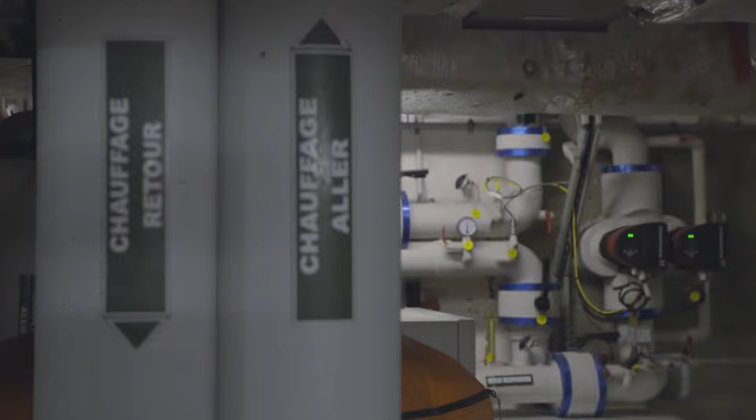Today, this ingenious system is notably used to heat public buildings, as well as a pool located in the 14th arrondissement of Paris. The heat pump located in the pool's basement is used to heat the showers along with the pool itself at a temperature of 26 degrees.

The first feedback we received was that this system is ideal for pools because they need a permanent heating system. It makes this particular one very interesting. The city's strategy is to develop this energy source by extending its use to more and more sites. By retrieving the heat emitted by the sewers, this pool lowered its electricity bill by 70%.

In the years to come, several schools and public buildings will be equipped with the same system. The Paris sewers are therefore about to become a significant renewable source of energy.

Thanks to the architectural feat and the visionary ideas of Eugène Belgrand, the Paris sewer network was able to endure through centuries. Looking back, we have to admit that they were incredibly visionary builders who created a system that remains in use today. And what happened? Other cities have had to renew their equipment much more often, while the Paris system has been working since the 19th century without needing any significant changes.

Seeing that these infrastructures are more than a century old allows me to say that the sewer system is part of Paris's heritage. As time went by, the Paris sewers were upgraded in order to keep fulfilling their mission, all the while protecting the environment as much as possible.

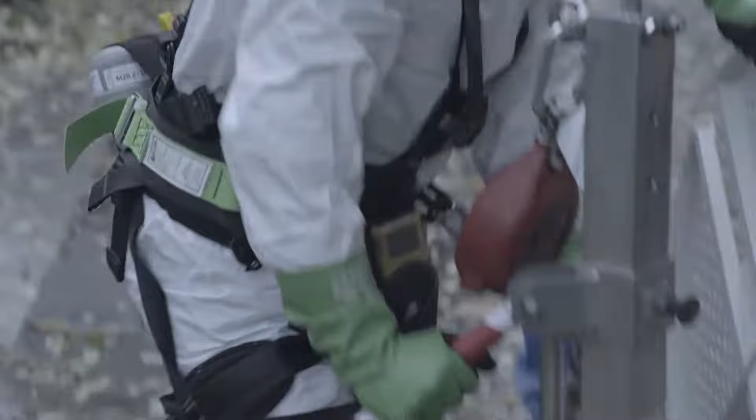The Paris sewers are both very old and very new. Their structure and their 2,000 kilometers of tunnels are very old, but the upgraded modern facilities are very new. Nowadays, the Paris sewers are a perfect blend of historical legacy and modernity. But this huge infrastructure wouldn't work without the hundreds of men and women who contribute to its daily maintenance.

This infrastructure, the equipment, but also the sewer workers, contribute to the development and the thriving of the city. They're invisible, key protagonists playing a part in the quality of our daily life. We're the guardian angels of Parisians and hygiene. Our job is essential. One should be proud of being a sewer worker.

Every day, all the wastewater is discreetly transported and treated through the sewer system. This technical and human feat allows the City of Light to keep shining on the surface.